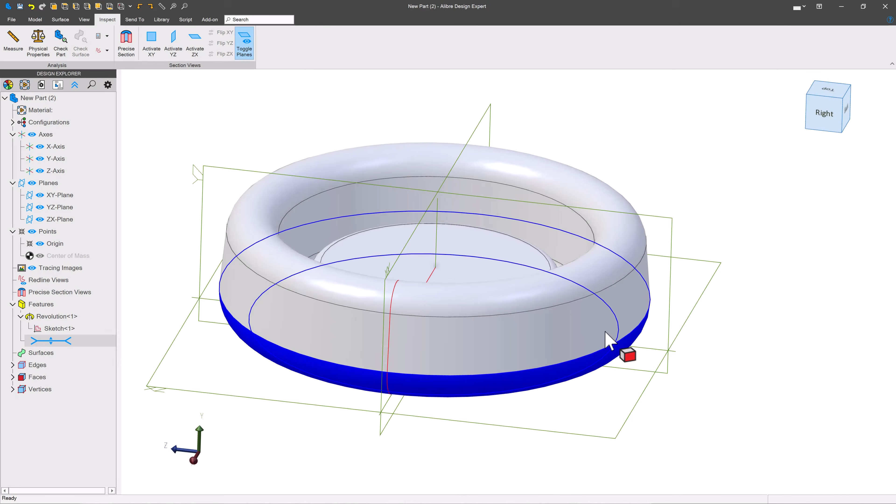So we've got a forum question here, and what we're looking at is a revolve, and it is a solid revolve. We want to make this into something hollow so that we can pour concrete into it, take two halves of this part off, and basically pour a mold so that we can make concrete in this shape. How do we do that?

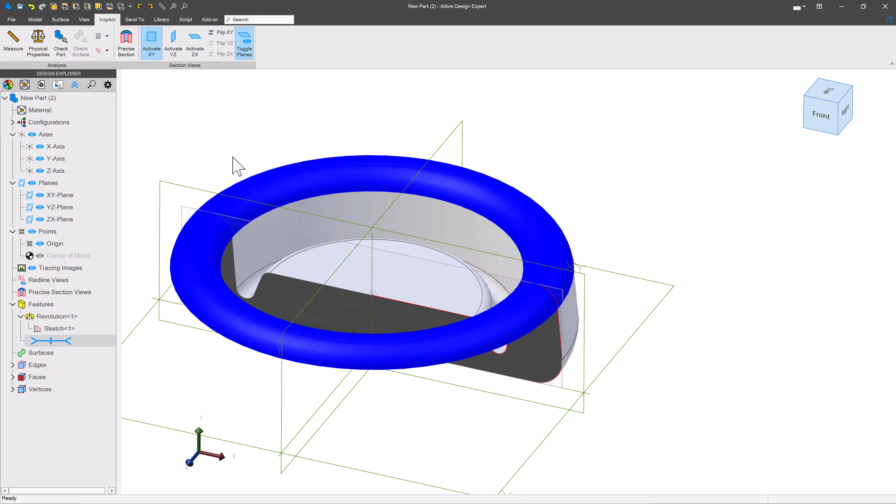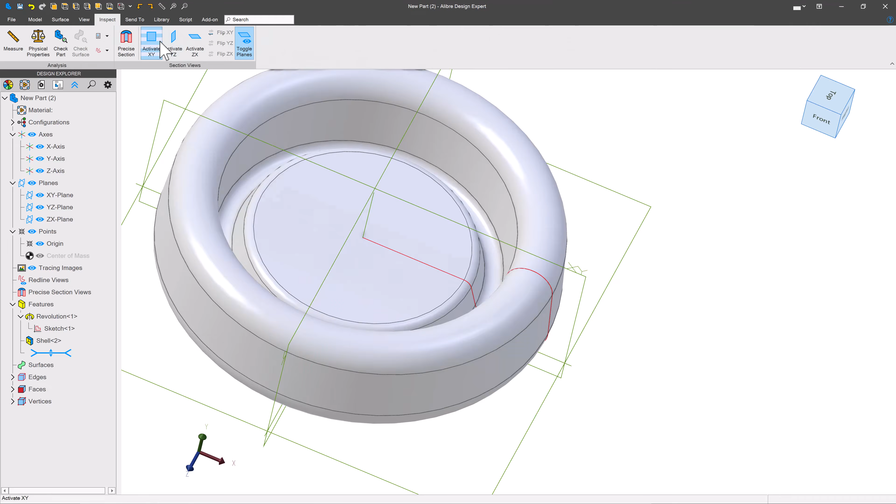Let's talk about first hollowing this out. One way we can do this is we'll go to Model, go to Shell, and shell this at 0.05. I can choose a face to remove if I want it open at that face, but we'll just clear all and shell it. Now if I inspect, I can see that I have a relatively constant thickness hollow area.

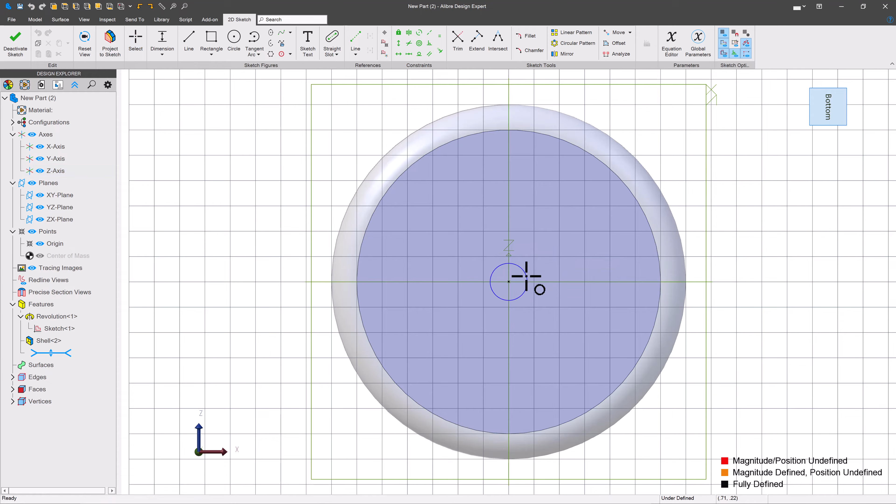Then maybe I want a hole that I can pour concrete in from. So I can create a sketch on this face and choose a circle tool, making sure we are on the origin. We'll give this a dimension of let's say 0.75 — I don't know what a good size for concrete is. Then we'll extrude, selecting to next, in the other direction of course, and we're able to make a hole that we can pour concrete in.

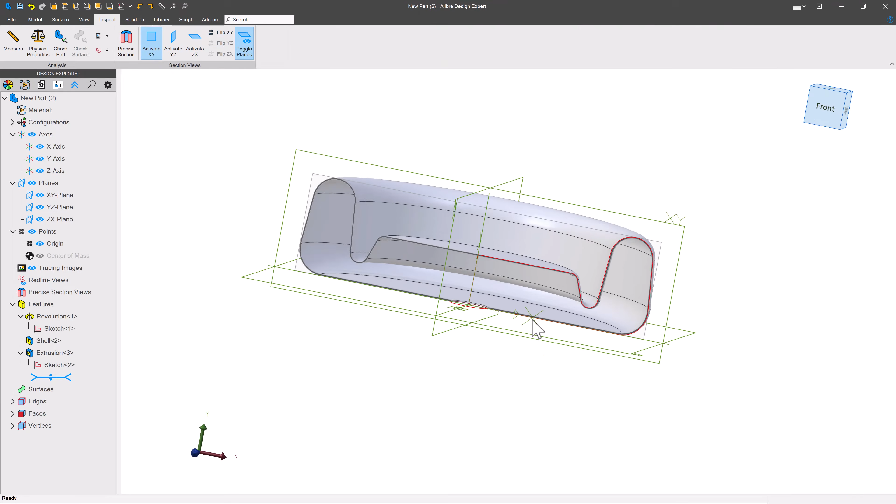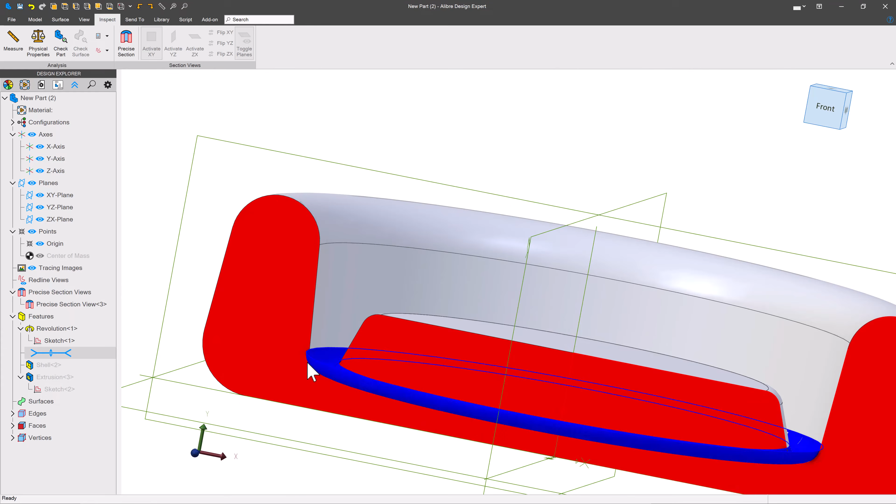Now you can make the argument — let's activate a precise section view for this. We'll go on the XY plane and reverse. Now, these outside dimensions are what we want our final part to be. But when we shell, the hollow area that concrete is going to fill is offset, so the part is scaled smaller than the dimensions we actually want.

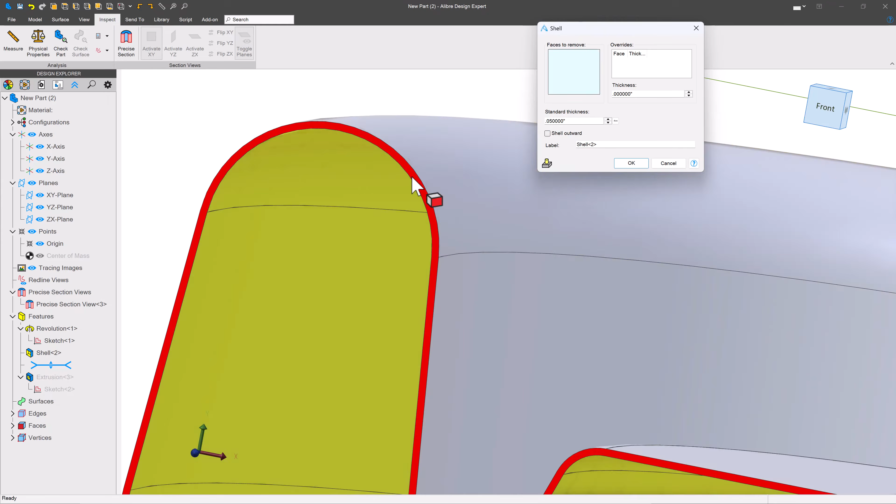So one option is, if we've modeled our part to its final dimensions and we want to shell it, we'll choose shell outward. That moves the thickness to the other side so our original part is the size the hollow cavity will be — no sizing problem. Now we'll roll forward, and there's our hole.

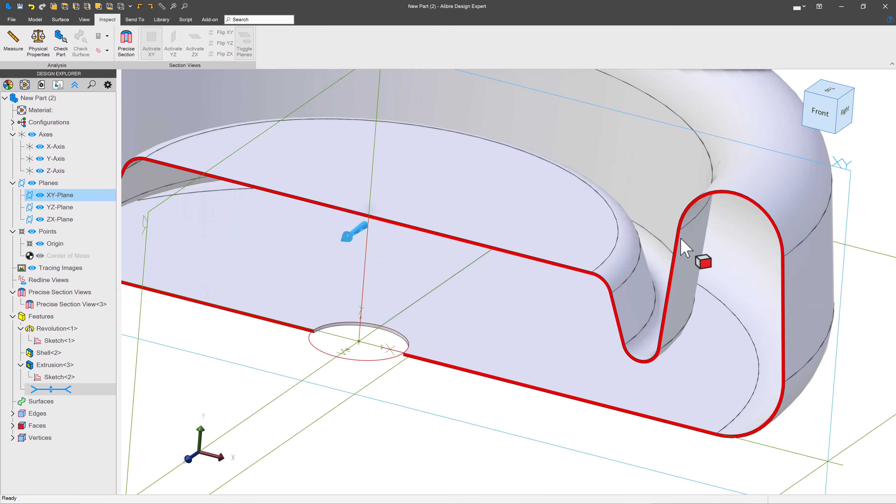Now our goal is to get this into two pieces so we can split this effectively. Here we've got a lot of draft going on — this is drafted like 5 degrees on each side so we can pull this top part off the mold very easily. We need to split this according to draft.

Now, some platforms have a function where you can choose a plane or an infinitely thin surface and split the part on that. As of the recording of this video, that is not currently supported. So let's talk about two ways we can do that.

Of course, the boring and not fun way is to delete the part you want to have be the other side, do a save as, flip that sketch, delete the other part, and put these two parts together as separate part files. For a lot of people that isn't a workflow they want to go down, but it is an option if that suits you.

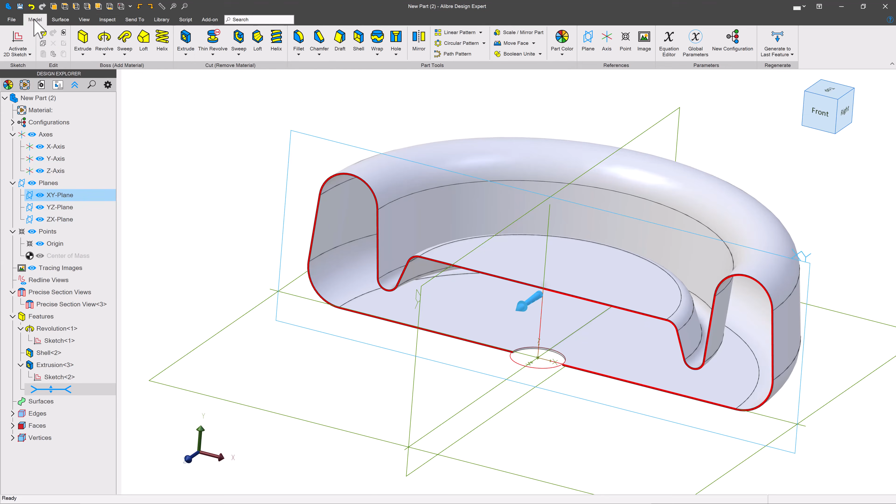Another way we can do this is I'll click on my XY plane and create a sketch. Now I'm going to project my revolution sketch here, maintain association, and put this in as a reference. I just want to reference right where this arc becomes vertical.

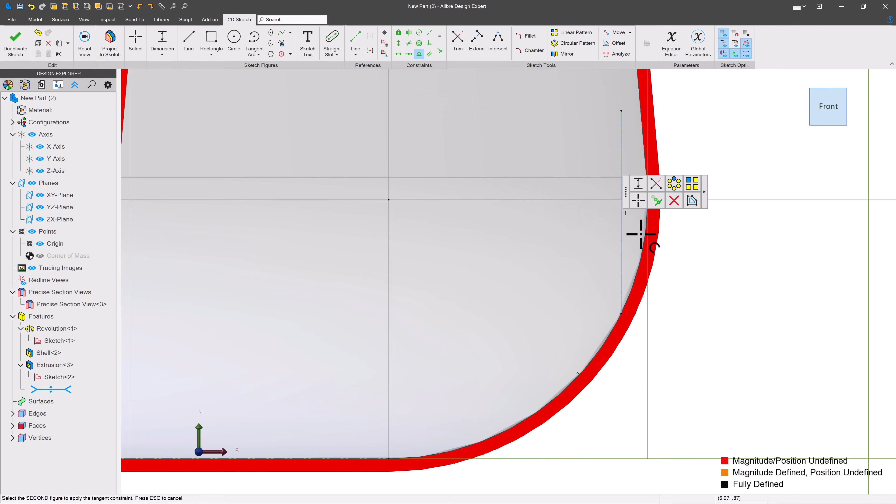I'll create a line right there. We'll add a coincident relation so this point sits right on this arc, make sure this line is vertical, and go with tangent. So I can see that the point on my line is directly at the point of tangency.

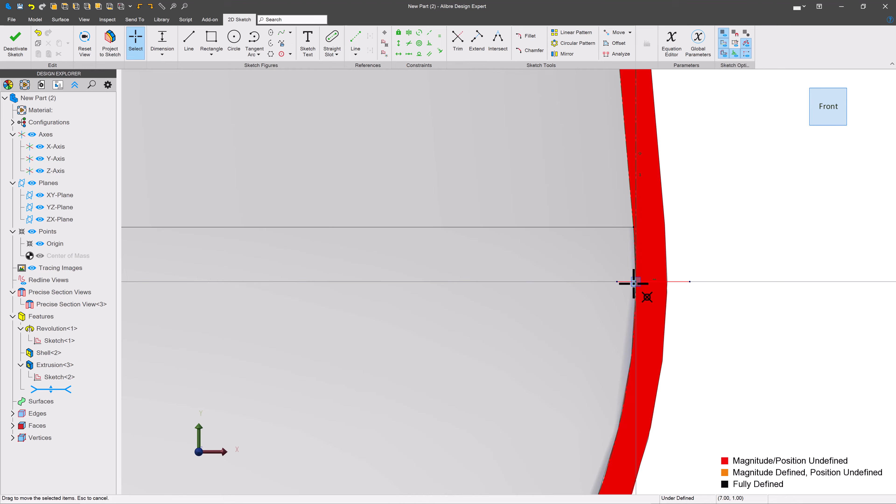So that's our point of tangency, and perhaps I'd like to make a line. We can make sure it's coincident onto that point of tangency so it's constrained right. So now I know that everything below this line can fall off and everything above this line can fall off, and we're good with our draft.

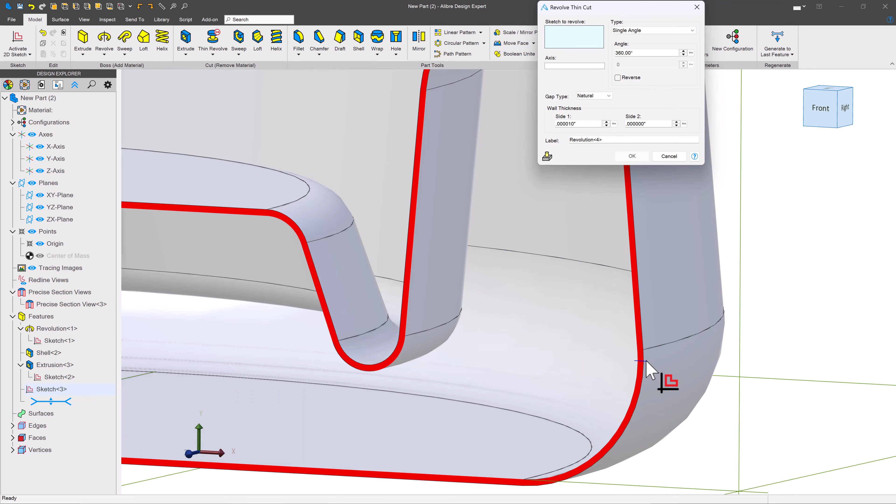So when we go to split this part, this is the only part we need to split. Let's deactivate our sketch and go with a thin revolve — just click this little drop down and choose thin revolve. Again, this is for Pro and Expert. If you're in Atom 3D, you could probably just do a rectangle with the following dimension.

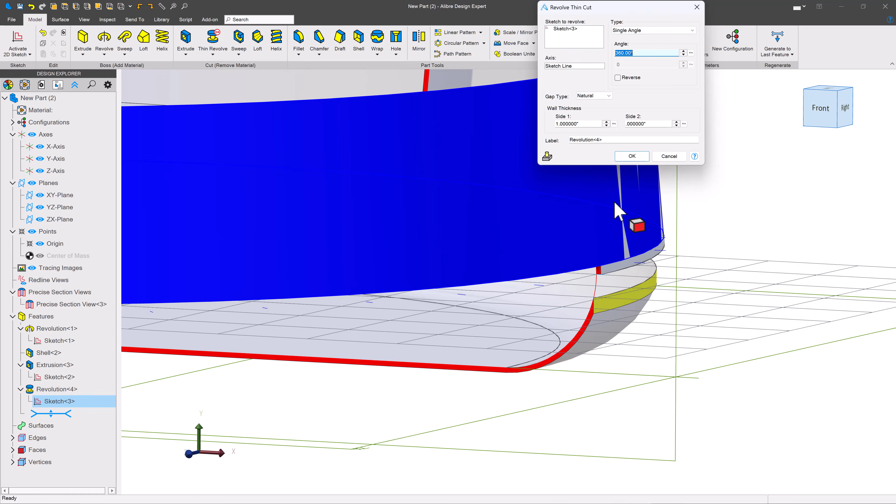We'll go with our sketch to revolve first of all, and then our sketch axis to revolve, right there. Normally this will come in at a thickness of 1, and you can see that's not ideal.

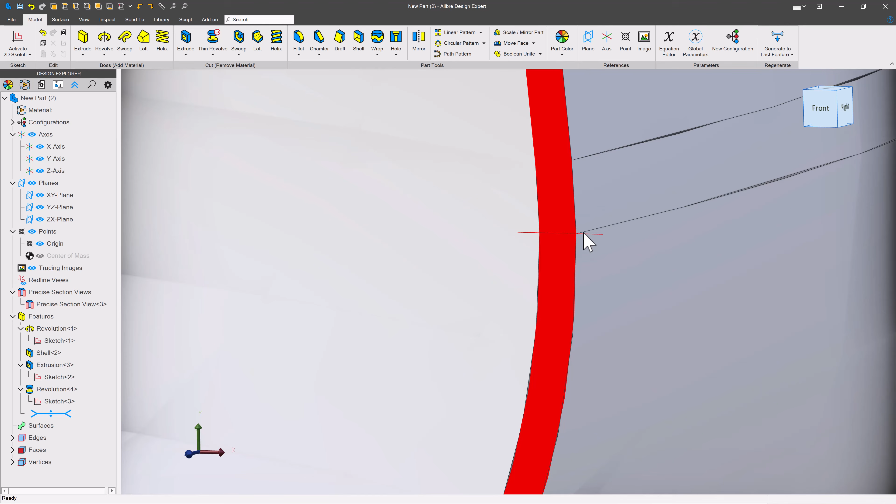But we can change this thickness to be something like 0.00001 — I might even add an extra zero for good measure. We've come up with a gap so insanely thin we can definitely work with it. This will fit many, many times within pretty much any tolerance out there. It is so small we haven't really lost anything. We've been able to split this part. That's how we can hollow out and create a section on something pretty easily.

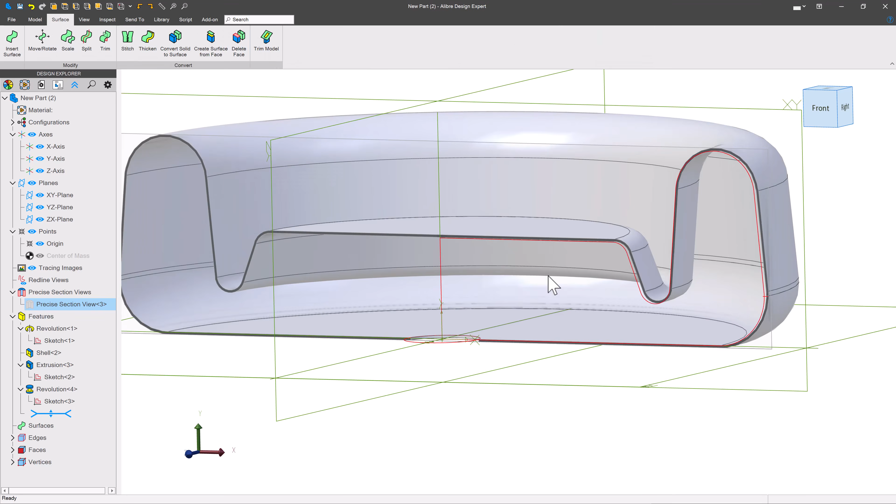Now, if we need to move parts around, we don't really have a built-in feature for moving bodies, but that's okay because we have surface tools. So I can convert to surface, say move this part along its surface. I'll go with a precise move in this case and move it down this axis, let's say a distance of 3 inches.

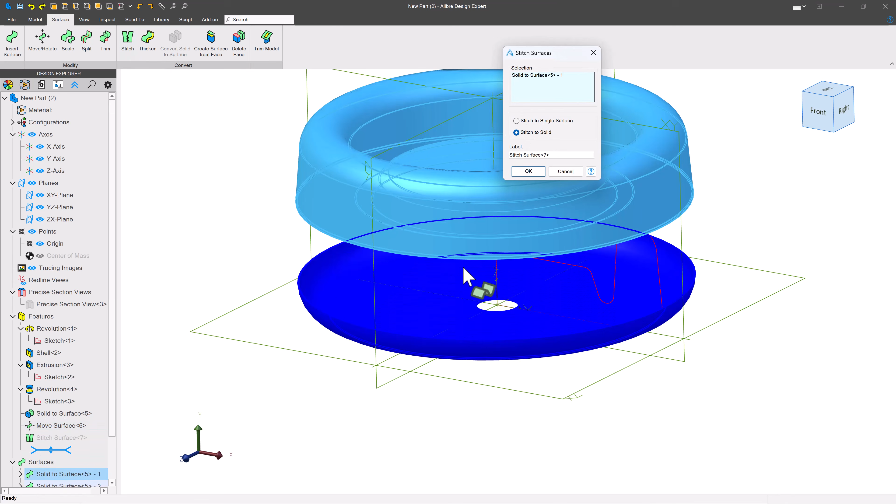Okay, and then I can stitch them back together. I can also choose this surface to stitch to solid as well. So that's some ways we can work with two halves of a single part and make some of these casting design workflows.